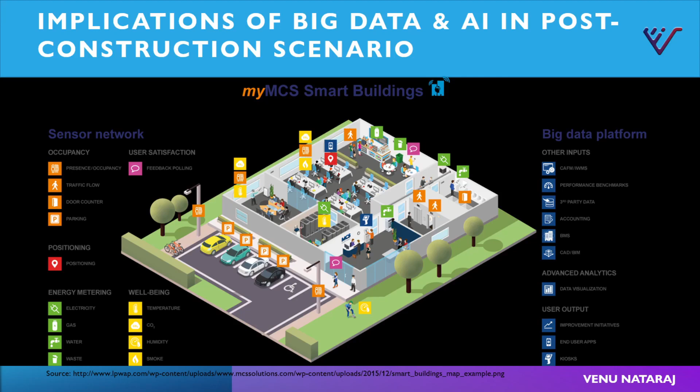If your model is able to successfully connect whatever work you're doing before to all this data after you have delivered, then you are providing a seamless transition. The data used to produce the project can then be used to run the project successfully as well. That's where BIM becomes very important, and that's why a lot of this data is getting transferred to BIM, because it's easier to assimilate and analyze data on an existing model with the parameters already set. A lot of your Revit, EcoSim, and Graphisoft ArchiCAD projects are capable of tracking this data once the project is constructed as well, because the machinery can be got exactly from the industry.

Now let's look at implications of AI in construction. One is building material manufacturers can look at how many times the product they are putting in the market is getting rejected or coming back, and based on that they can do their quality improvements.

As merchants, how you can improve your procurement cycle. As facility managers, how you can control the buildings and understand the different qualities of materials in your building, and proactively manage repair and maintenance. For construction companies, they can understand how to use machinery, how to reduce search time for tools and machineries, and it also helps improve safety for laborers. If you are able to control and quality-check your materials at site, you are also safeguarding your employees or laborers at site from getting hurt accidentally.

For architects and planners, this will help in generative designs. We will look at a small example of generative design after some time, but that is also something we can do—we can take in all these parameters and produce a design more conducive or appropriate to it. BIM, as I mentioned, is one of the leading elements bringing big data, AI, ML, and cloud computing together.

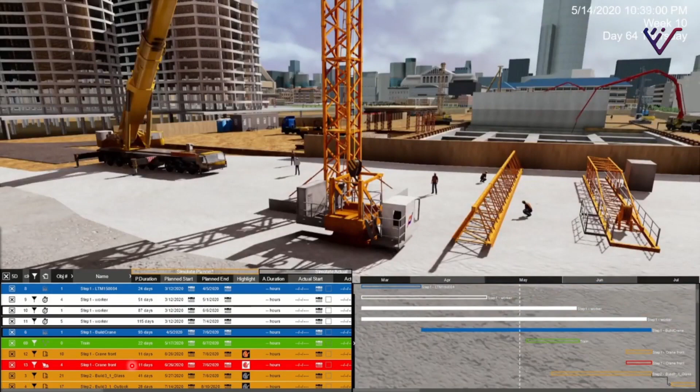Here we've particularly taken a snippet of the crane working on the periphery of the site, because you can see that it also shows the adjacency effects on the buildings which are already constructed according to the phasing, and the impact on the nearby site elements.

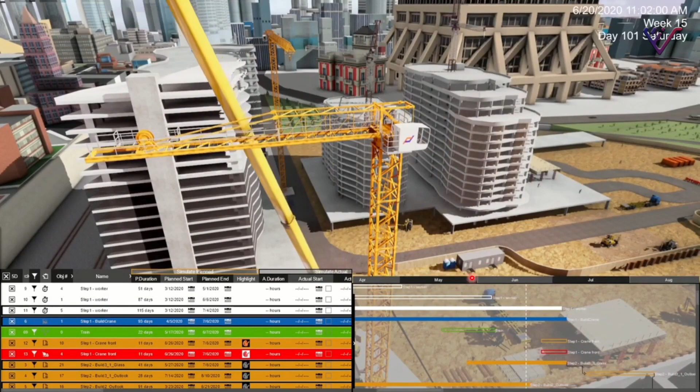This also shows - let it just zoom out a bit - you can see how the core is getting constructed.

You will also see at what stage dismantling of the crane needs to happen, because that's also an important aspect. You should be able to take it out of the site once dismantling is done. So you get to see all that programming aspect here.

And then you notice this crane which is going out of the site level to be able to do delivery work. And this basically tells us when all we need to have protective barriers, at which stage of the project we will need to have a protective barrier.

And this is happening through simulation. So we are able to understand how the project needs to be delivered throughout the course of its production.

And this is another example of big data and artificial intelligence being applied. So this is a tool called Dynamo, which I spoke of some time back. This tool is called a graphical programming interface. It's similar to Grasshopper, which you see. Here we used it to deliver a skyscraper.

We added certain parameters to it in order to achieve the required FSI, and we saw how we can alter or transform the shape of the buildings.

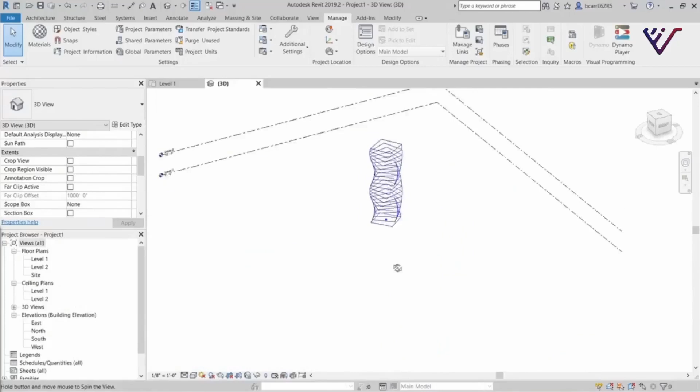You see, whatever changes we do there at the beginning, we are able to make changes to the building and bring it into the Revit environment to start working immediately from there on. So right from the conceptual massing level, I am able to take it to documentation stage.

You find this interesting? Yeah, so this is an example of generative design or computational design.

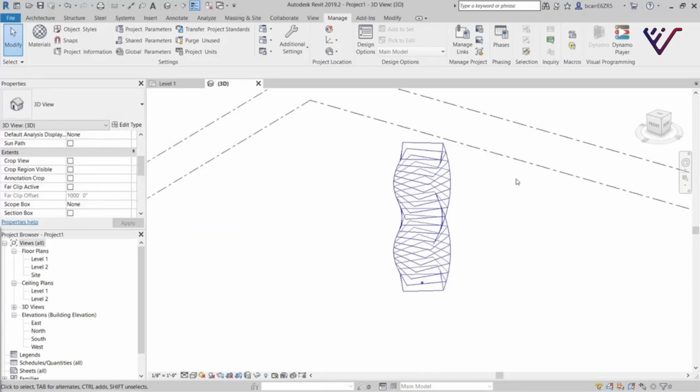Now let's look at big data and cloud computing in building construction. So first we saw big data and AI, now let's see big data and cloud computing.

So we already spoke of Oracle Aconex. We spoke of BIM 360. You also have other applications like SkySite, Procore, FieldWire, BuilderTrend, and Enscape. Enscape is a rendering software specifically used for building renderings and walkthroughs, which happens entirely on the cloud.

So no resource on your system gets used except for transferring the data to the server. Everything else happens on the cloud, and it's a real-time rendering engine.

Aconex and BIM 360 we have already looked at. They are the most prominently used common data environments. Procore is specifically built keeping site activities in mind, FieldWire and Procore for that matter. BuilderTrend does trend analysis and gives future predictions for designs. SkySite is another alternative to Procore. Whenever you have time, look at these applications—they're widely used in the industry. BIM 360 and Aconex are already being used by most project management firms. Enscape is also something I'm using right now to do my renders.

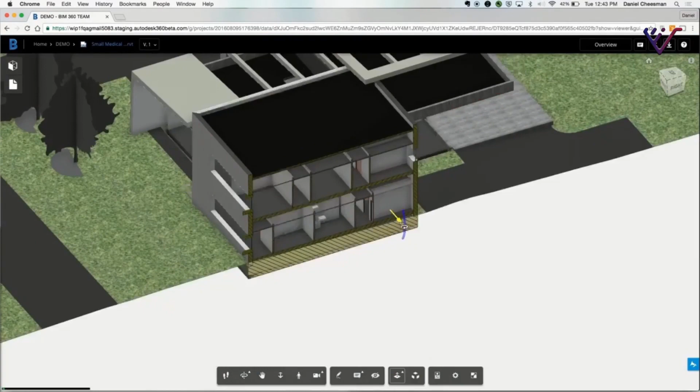You can see different people in the project can be assigned different responsibilities, so the level of information they can see and edit can be altered. Here is a building being discussed between two consultants. This is on cloud, remember—this is not an individual system. An architect's model is being reviewed with the fire safety consultant.

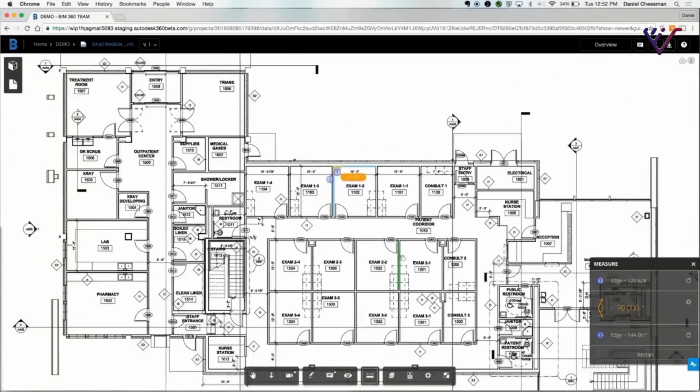In the next example, we'll see how site information is also being reviewed by someone who has access only to the drawings, not the model. And here you can see a construction site to client coordination.

It's the same file which both of them will look at. It's the same discussion—when the two people are having a discussion, both of them can do a walk around of the building, but each one will see the same screen of what the other person is showing. This way you ensure communication doesn't lag or get confused. This is all happening within the BIM 360 platform.

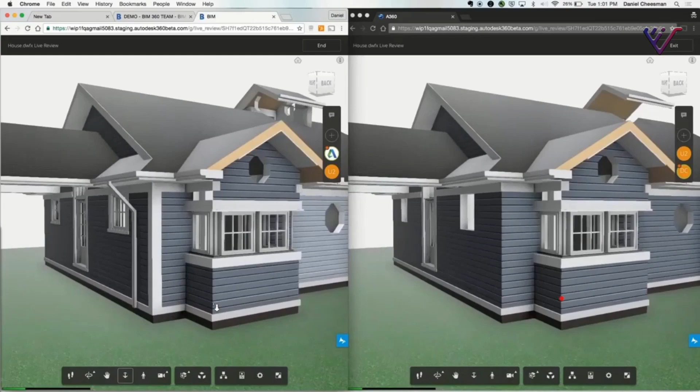Now let's look at some case studies, some projects I've personally worked on and delivered. The first one is a retail design automation project, done when I was part of Tesco, and I worked with architect Balaji—giving him the courtesy here.

They tell you, no, we need more fresh or green produce, less meat, more dairy. All these changes keep happening, and you need to go to and fro between different teams. Once that's done, it goes through an approval process where middle and higher level management agree on what the store is getting built for.

It approximately takes 32 hours for a single store to get designed for discussion. Then there's the separate effort of manually calculating the BOQ or BOM for the project. So this is how the traditional design process for a retail store would have happened at Tesco.

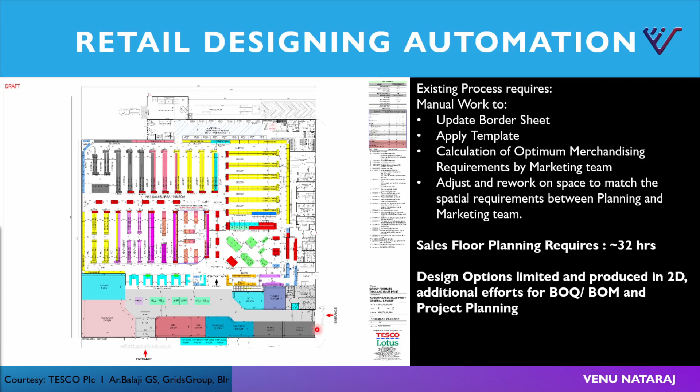All we need is the exterior wall for the store, and everything else gets produced automatically. We just produce the outer wall, define the parameters within which the store needs to be developed, and based on the coding already done in Dynamo scripting, it creates an automated 3D model. The power of Revit, as most of you know, is it can give automatic BOQs and BOMs, so we schedule our quantities automatically too. It finishes within 10 minutes.

The work which previously was happening for 32 hours and still prone to errors was being completed in a matter of 10 minutes. So you could create more variations. Remember when we spoke in the beginning, the core purpose of a business or a management information system is to deliver value and profit to the business. So this was in that direction where we were saving time, we were able to create more options, make a better informed decision, and thereby creating more profits and adding value to the design chain system.

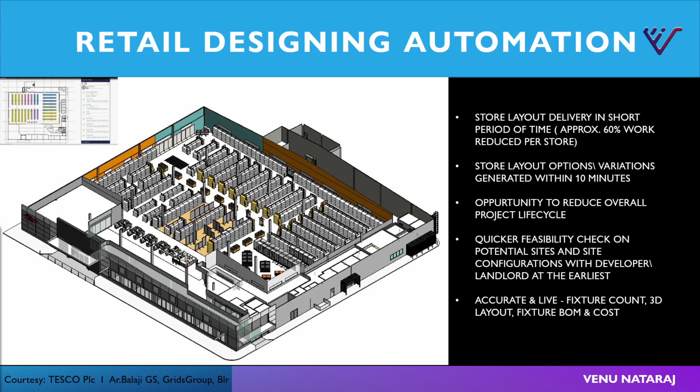The other project that I would like to show here is the police clubhouse, which we did at Muscat. The entire project was a modular design, meaning all entities were following a certain dimension or multiples of it. When I was personally involved in this project, the project was already halfway through, meaning the entire core or concrete structure was already built, and only assembly of tiles at site was to be done. There were multiple parties involved, and the core requirement for the client was to ensure that we use the existing BIM model developed by the principal architects, Khatib and Alami, to produce the tile requirement list for the project and deliver it on time.

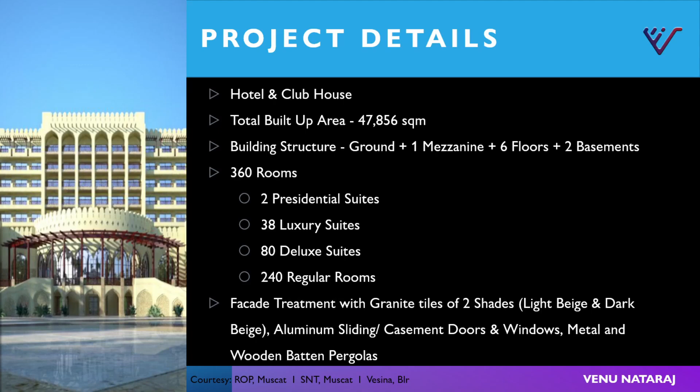Okay, so that was the brief that came to us. When we started, this is how the site was. The site already had all of this built, and the dry walling system or granite cladding system was to be done. The post structural frame construction was happening at Muscat, and documentation of the site was already in progress there. Facade framing and modular designing was happening at Bangalore, at our office, and asset tagging for extraction of BOQ and BOM was supposed to be done by my office.

And the CNC cutting of the granite based on the information we produced was being done at China. So I needed to share this information with a granite export company in China, and we had to do a live feed between Muscat, Dubai, and China. Dubai had Khatib and Alami head office, the principal architect for the project, and all this tiling was to be delivered in Muscat and installed at site. So you can see the complexity of the project. There are multiple parties, all sitting in different locations, different time zones, and probably having a different understanding of the project from each other.

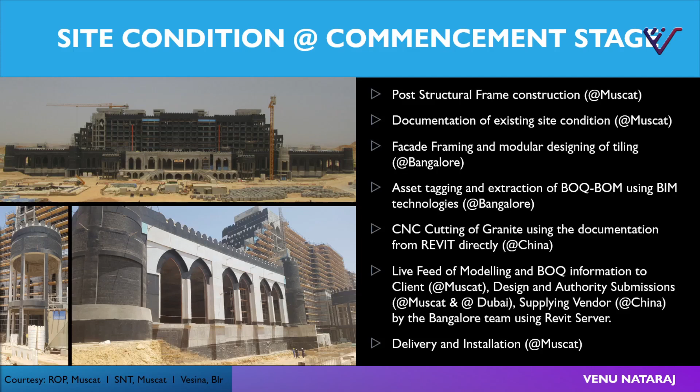So what we had to do here was, the first thing we did was use a centralized system on Revit server called Clarity. We put up the entire database there, the Revit project, and then we started creating an asset tagging mechanism. We had to first devise an asset tagging mechanism which would be read similarly by all the parties involved.

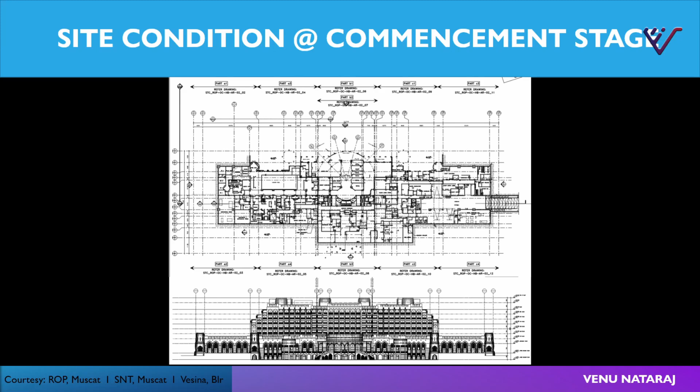Just to give you an understanding of the scale of the project, the width and breadth of the project, it was split into, as you can see here, 1 2 3 4 5 on this side, 5 on that side, 5 at the ground level, 5 at the substructure level, and 5 at the superstructure level. So totally the building was split into 20 pieces. The whole elevation could be split into 20 pieces. That's how the building was first split to create manageable pieces of asset.

Then what we did was set the objective for the facade project. Tagging of every granite tile on the facade was the main intention first, so that we can track which tile is ready and which tile can be shipped to the site, and what information regards each tile. We had a total of 1,84,000 tiles which were supposed to be tagged. So you can understand the amount of effort that had to go into it, and we didn't have much time because the building was already built to that stage. The Chinese contractor already had a month's delivery timeline, so once we placed the order, he would take 1 month to cut and ship. The target was to have zero wastage. That was the target we set for ourselves when we started the project.

Then we were able to enable this process by making use of BIM application and unique coding or automated tile tagging system. I will show how we did that, and generate quantities based on this tagging so that accuracy is maintained. The first exercise we did was look at how we can break down the building into each tile so that duplication of counting or numbering doesn't happen.

So this is what we arrived at. We did a series of tile coding system. The first one here talks of the facade, whether it's the north, south, east or west facade. So S, N, W, E. Based on that, you can go to that side of the building.

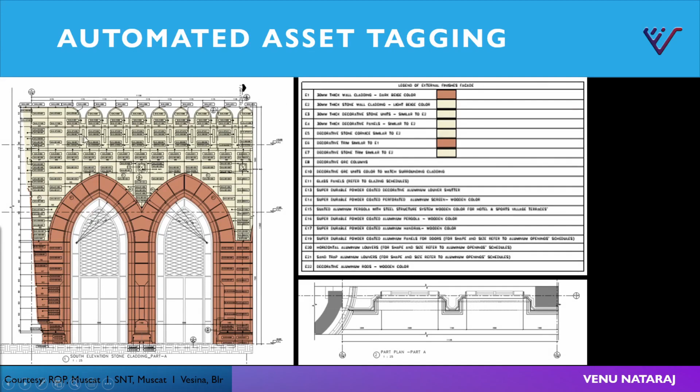So finally what we arrived at, you see here we could number each and every tile in the project based on the part that we were dealing with. Each and every part of the building was tiled and numbered. Each and every door, window, the junction for the door and window was also numbered.

Here we have certain types of assemblies, so those were also numbered using a different system. It's the same nomenclature system, but we would say what type of assembly that is, and tag each type of assembly. So what does an assembly mean? It's not a single stone piece, but it needs to be created as one piece, this whole thing, so that it can slide and frame into wherever it is being designed for.

So this won't be created as one piece of tile there, one piece of tile there. You will not be able to do that sticking and gluing at site. It will become too much to manage. So we designed these assemblies as well.

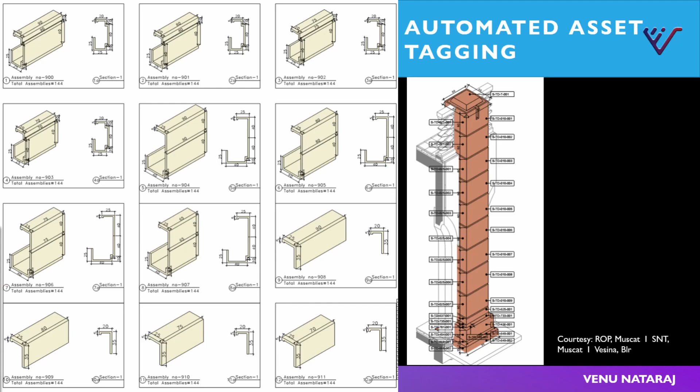This way we would ensure that absolutely no wastage happens and exactly the number of tiles required at the project are delivered.

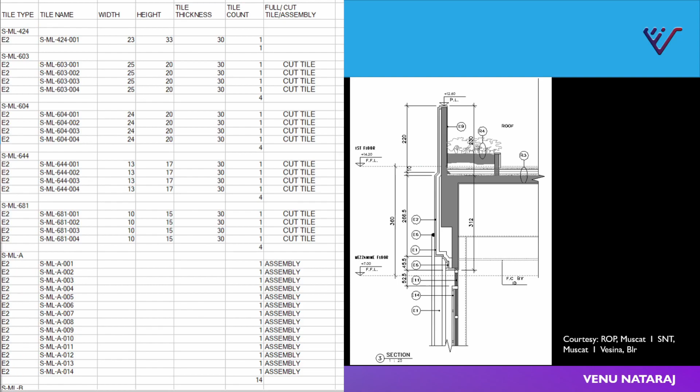So that brings to the statement of why I think big data and AI is very important in the construction industry, because it helps you keep not just the cost of construction, but also the economical and environmental impact that the project would have. It is not just about using materials to build, it's also to ensure that you don't waste the materials.

That's a simpler and easier way to build sensibly. So those were the two projects related to this, and thank you for your time.